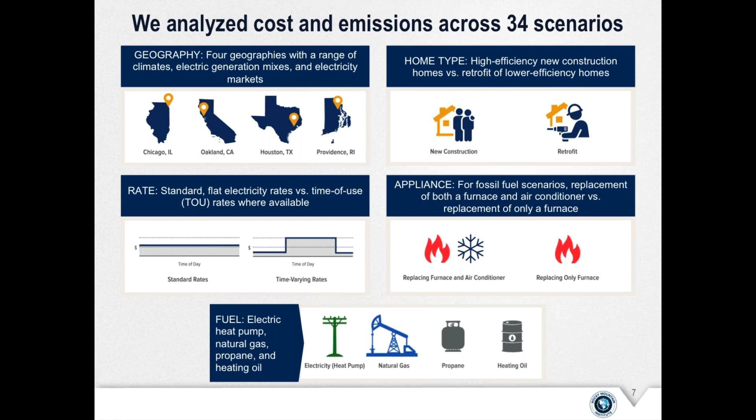Thank you. Just a few notes on the methodology: we modeled the heating, air conditioning, and water heating for a full year at 15-minute intervals for both scenarios, using Energy Plus to model the space heating and cooling demands.

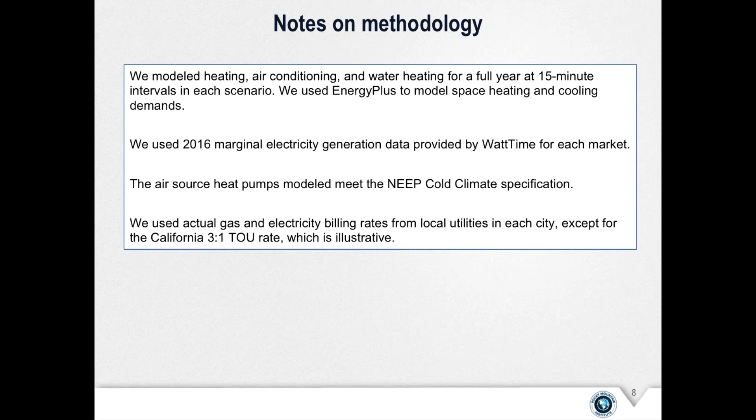In terms of the carbon impacts, we used 2016 marginal electricity generation data provided by Watt Time for each of those different markets. The air source heat pumps modeled meet the NEEP cold climate specifications, so they do work under quite cold conditions. For billing rates, we used the actual gas and electricity billing rates from local utilities in each geography, excepting the California 3-to-1 time of use rate, which is illustrative of a more dramatic time of use rate option.

To give some high-level results, a big takeaway is that electrifying homes is cost-effective today in some scenarios, but is still more expensive for most existing natural gas customers.

The most cost-effective scenarios include new construction, especially when considering the avoided cost of underground gas infrastructure. Additionally, customers using oil or propane who do not have gas service will find electrification cost effective. And natural gas customers who would otherwise replace an air conditioner and a furnace simultaneously will find electrification cost effective.

Optimizing devices for time of use electric rates can significantly reduce the lifetime cost, but that depends on the rate design details and is not in itself enough to change the overall outcome between electricity and gas.

Electrification already reduces carbon emissions with today's technology and today's electric grid in all but the most coal-heavy regions. Out of the cities we looked at, that's Chicago. This is especially pronounced in a place like Rhode Island, where the grid is already relatively low carbon.

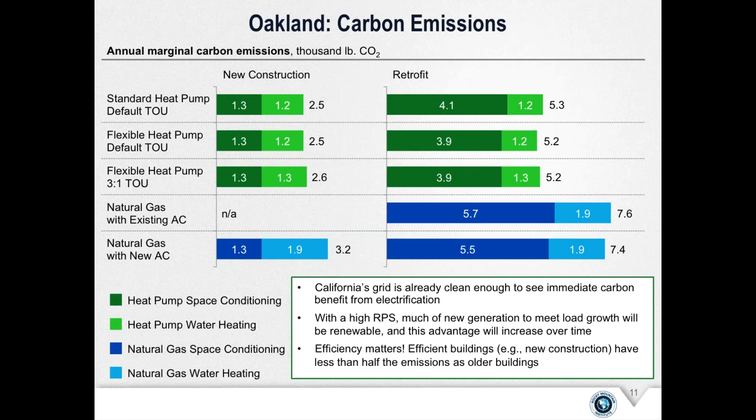Moving on to Houston, Texas, where again we looked at a standard heat pump on a flat electric rate, and we also looked at the free nights rate in Houston, in which electricity is at a slightly higher cost during the day and is actually free during the nighttime hours.

So we looked at a standard heat pump on that rate, as well as a flexible heat pump, which again tries to shift the load into those free nighttime hours. We also looked at natural gas with both existing and new AC.

Looking at the carbon emissions, the Texas grid, like the California grid, is already clean enough to see immediate carbon benefit from electrification. And again, efficiency matters. The retrofit homes had significantly higher carbon emissions than the new construction homes, because of the overheating in the free night scenario during the nighttime hours to allow for a lower load during the daytime hours. That excessive overnight energy drives the higher emissions you see in the flexible free night scenarios.

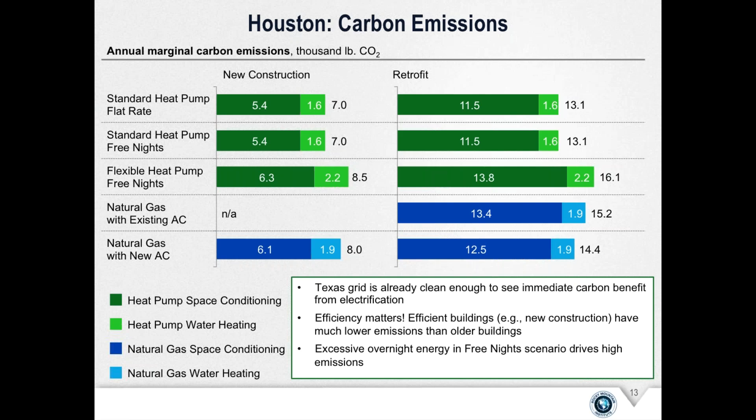So in our case, the way we optimized for demand flexibility was to apply a time of use rate and attempt to optimize the devices for that rate. We can see here in these load profiles a couple examples of what that looks like. So what's on the screen now is the Houston scenario. This is January, so it is heating season, even though it's not very cold in Houston.

As Sherry mentioned, the rate provided by one of the retailers we've chosen to model is actually free from 9 p.m. to 6 a.m., and then is more expensive in the middle of the day. So on the top profile, you see the uncontrolled load. The blue is water heating, the red is space heating. As you might expect, the space heating loads tend to be higher during the night when the temperature is colder outside, and minimal during the day when the temperatures are mild.

If we try to optimize that, the strategies we employ are to preheat the water. In this case, we've chosen a very high temperature set point because the electricity at night is literally free. We've heated it to what's probably the maximum technically feasible with this type of technology, which is 165 degrees. And then we've heated the home itself an additional 5 degrees higher than normal, in Fahrenheit. So we see it creates a much higher load in the early mornings during this off-peak or free electricity period, and then there's a big cliff right at 6 a.m. when the price kicks in.

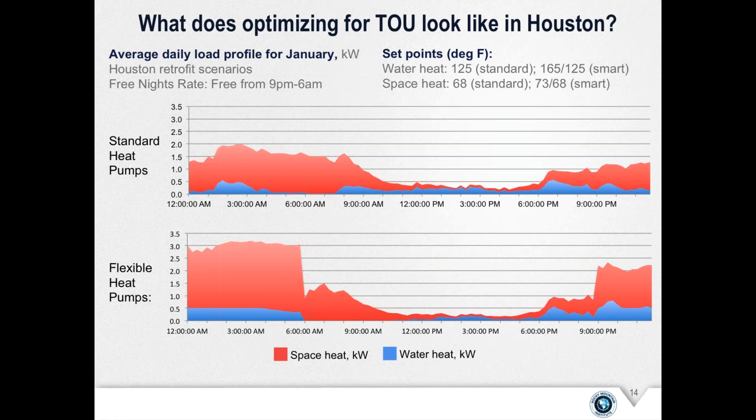If we flip to the summer, this is July now, and we're looking at an air conditioning scenario, you can see much higher use in this hot climate of energy for air conditioning. The top is uncontrolled again, and the bottom is trying to optimize.

So once again, you see water heating is pretty effective, even though it's a smaller portion of the energy. You're getting 10 to 12 hours of energy reduction out of the water heating, increasing your usage during the nighttime off-peak hours. However, on a hot day in Houston, the energy is really dominated by air conditioning.

You can see here there's only a few hours of benefit. Really, the energy starts to kick back in within that first hour on a hot July day in Houston, and by about 9 a.m. you've pretty much caught up, so you're not actually getting any benefit into the evening hours. So I'd say one takeaway is that trying to preheat, or pre-cool in this case, before 6 a.m. on a very hot day doesn't really get you a benefit into the afternoon hours for space cooling.

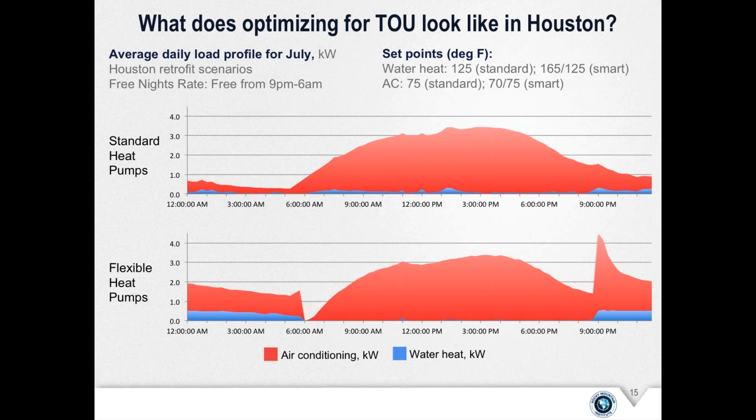However, it does get you some benefit for water heating, and this would be comparable for preheating in a cold climate. If we look at one more case, which would be the new and more efficient home,

We can see first and foremost that the magnitude of the load shape declines drastically. The timing benefits of demand flexibility are similar. The water heater is providing 10 to 12 hours of benefit. The space heating or space cooling in this case is providing 4 to 5 hours of benefit for the newer and more efficient home. But still, by far the dominant effect is the effect of efficiency, more so than of demand flexibility, because it lowers the overall profile so much.

And even though here we're showing a warm climate in summer, the profile results are comparable for cold climates in winter. That efficiency is really the dominant factor. Water heating is highly flexible. Space heating has a few hours of flexibility, but not the 10 to 12 hours of flexibility that you could expect from water heating.

Okay, so now we'll move back into the other city results, and then we'll revisit some questions after that.

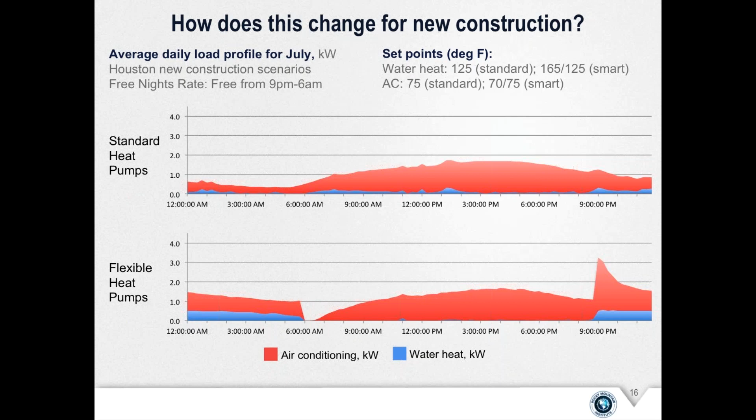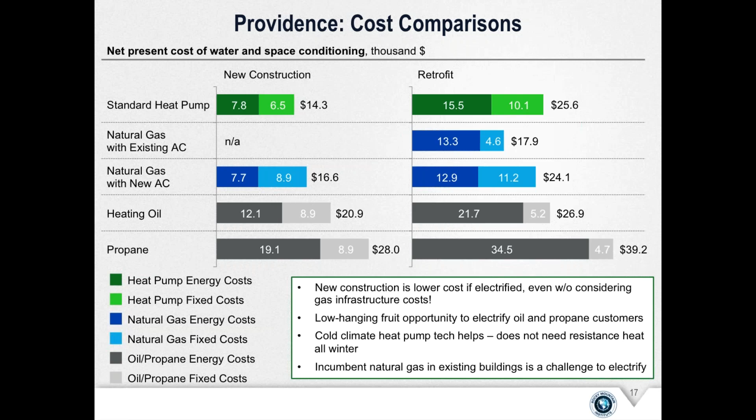Then moving over to the carbon emissions, you can see that heat pumps are significantly less carbon intensive than all of the other options, and that the New England grid is already clean enough to see major immediate carbon benefit from electrification as compared to natural gas, but obviously also as compared to heating oil and propane. And again, efficiency really matters — the efficient buildings have about half the emissions as the older buildings in some scenarios.

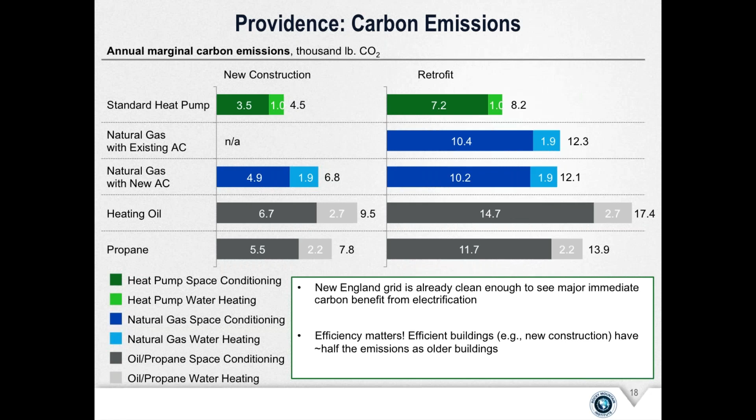Great, and then moving over to Chicago, where we compared simply a standard heat pump compared to natural gas with existing AC and with new AC, you can see that new construction, again, is lower cost if electrified, even without considering the gas infrastructure costs. And as we mentioned for Providence, that cold climate heat pump technology helps. Again, the incumbent natural gas in those retrofit buildings is challenging to electrify.

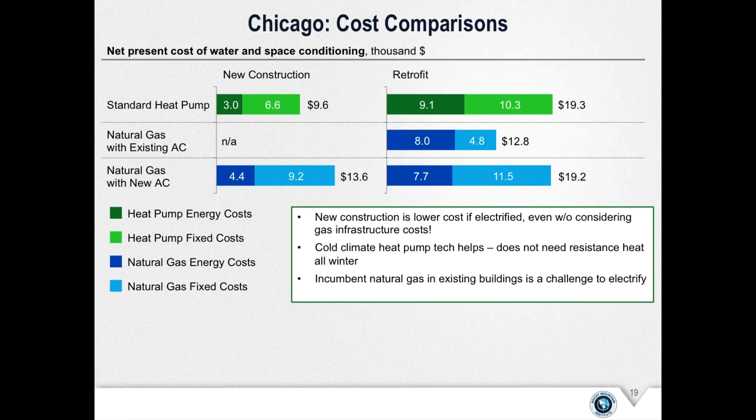Then moving over to the carbon emissions, you can see that through this marginal carbon analysis, heat pumps appear to be significantly more carbon intensive than the natural gas option. This is because the coal-dominated grid on the margin means that in this moment, electrification is immediately carbon increasing. We would expect that the carbon benefit over the device lifetime is possible if the coal retirement continues quickly. A full analysis of the future grid mix was out of scope for this report, but you can see more detail in the full body of the report as well.

We compare to average carbon emissions as well as a potential hypothetical future of what the long run marginal emissions might be. And you can see that electrification becomes much more carbon friendly, so to speak. And again, that point about efficiency holds true in Chicago as well.

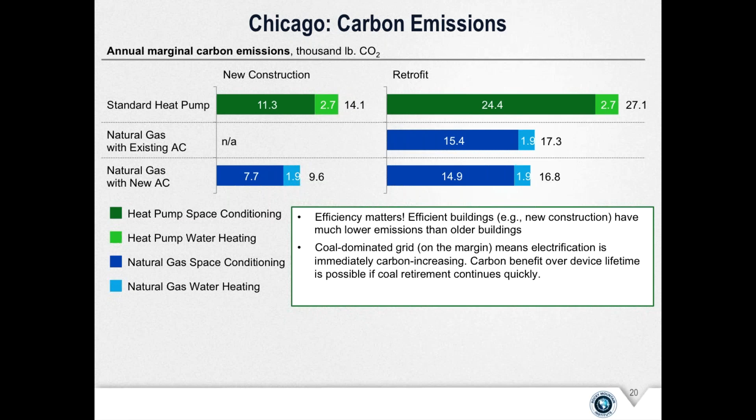So now just a little bit of an example around how, even when heat pumps are drawing power from an electric grid that is natural gas fired, they are still carbon reducing compared to burning natural gas in the home. Here we have in the first line a natural gas fired water heater with efficiency of about 62%, and you can see that it has just under 2,000 pounds of carbon dioxide annually. An electric resistance heater has significantly more carbon emissions than that.

But heat pump technology, which is what we were looking at, has a coefficient of performance that is greater than 1.

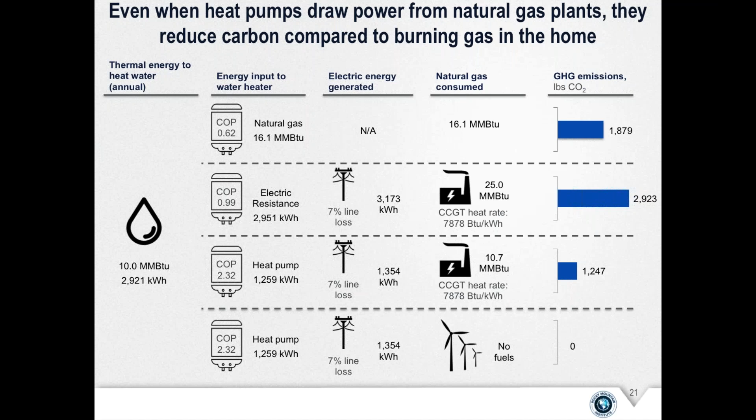Okay, we'll run through a few more slides and then we'll return to the questions.

So just a little expansion on demand flexibility. There's many services we could consider valuable in demand flexibility.

We've categorized them here. Load shedding is really the traditional demand response that curtails an air conditioner or some other load during peak period, maybe lets the home get warmer in the summer and maybe less comfortable. Load shifting, which is the approach we've taken, would try to preheat or pre-cool the space or the water in advance of the peak period.

Or additional services which are possible but which we did not include in this valuation. So ancillary services that may include frequency regulation, fast frequency response, contingency reserve, or others. These are technically feasible. They're used in some parts of the country for resistance water heaters, a little less applicable for heat pump water heaters, but not impossible.

And then localized grid support, which you could imagine but is not yet widely deployed, for managing voltage, actually building load during midday to increase hosting capacity for local solar, or managing peak on a specific circuit as a non-wires alternatives project. These are options, and these types of loads could earn additional value streams for this, but it's limited to date, and those were not included in our analysis.

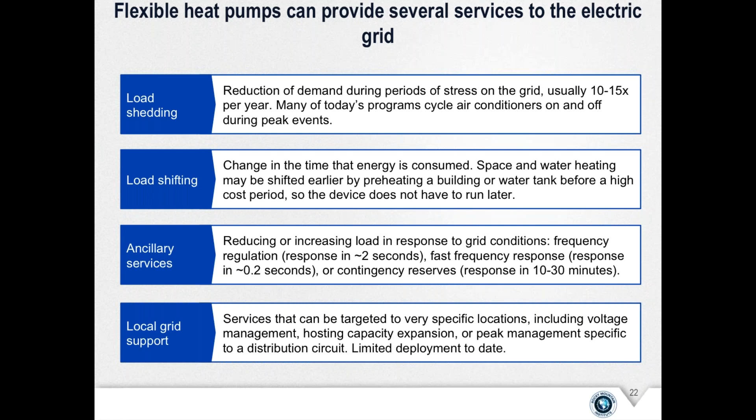So now to demonstrate that load shifting, here's an example from Hawaii of how a flexible heat pump water heater can shift the majority of energy use to the midday period where there is a lot of solar.

As you can see, with the on-peak period average daily load of a standard heat pump water heater, 25% of the energy consumption is happening during that on-peak time. But if you have a flexible heat pump where you're trying to shift that load out of the on-peak period and into the midday period with that superheating we mentioned before, you can bring that down to only 6% of the energy consumption happening in that on-peak period, with much more of it shifting towards the midday section.

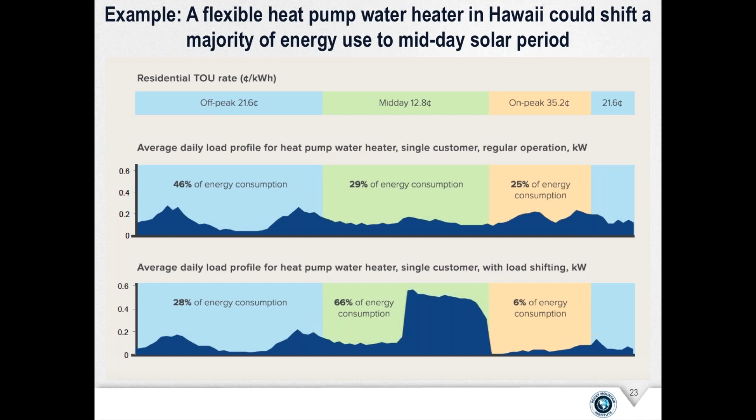So one other specific case to look at here: we wanted to explore is there an additional benefit if you combine distributed solar with electrification? We've applied that here in the Oakland scenario, and in this case, the answer is yes.

Whereas if you just look at the left two bars for a retrofit, we saw that the customer just sticking with gas could be lower cost, lower lifetime cost than switching to a heat pump. However, if we combine that electrification with installing rooftop solar in this case, we see a different outcome.

So it's very capital intensive. There's an additional $15,000 in this case for installing rooftop solar. But the long-term energy cost reduction is substantial and outweighs that, and makes the solar plus electrification a winning strategy on cost overall. And this is in part because...

In California, with this rate structure and this solar resource, solar in general is less costly than the utility electric rates. We're able to power those electric devices with lower cost energy from that solar. This is with the current time of use based net metering regime in California.

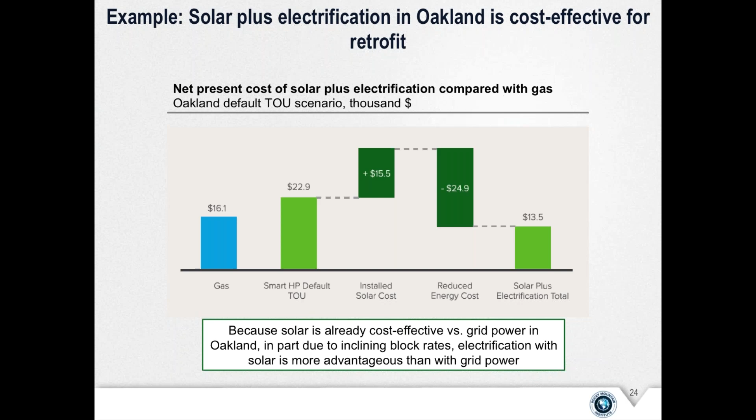And this also suggests that there's a business model, a business case opportunity for the solar installation companies to pair electrification with their solar offering. Because it's a value-added service, but also it increases the need in that household for solar panels to offset their electricity consumption. So this could be an opportunity for the solar companies to expand their business or upsell customers who are already looking to go solar.

Now, these costs vary widely. It's hard to say there's a one-size-fits-all cost. If a home is already on a street that has a gas main and just needs a new service, the small pipe that runs from the street into their home, it could be $1,000 or $2,000. It could be in that range. If a home is far from the gas pipeline infrastructure, it could easily be $20,000 or $30,000. We've chosen a median value from the data we could find here, which has an incremental cost of about $7,400, to show that cost, if considered, could even out these comparisons.

Now, there's a few other aspects to this. So one question is: is there also an additional electric infrastructure cost, which is not shown here? And the answer is it depends. So examples of that could be for a home that does not already have a 200 amp electric service panel into their home. They may need to upgrade their panel, which can be a $2,000 or $3,000 expense.

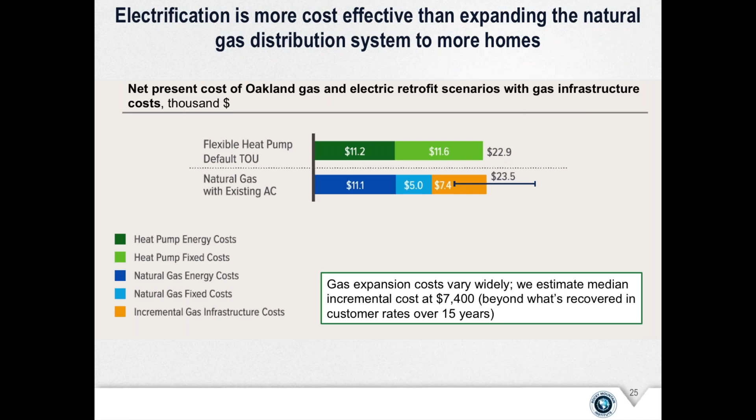Or if an entire neighborhood electrified and the feeder serving that neighborhood were not sized appropriately, that may need an upgrade. So it's possible there are additional electricity costs, and those are not shown here. But we'd argue that in general, we would expect the additional cost of the gas infrastructure to be a substantial opportunity to avoid for homes that are either distant from the gas grid currently or for entirely new developments which can be built without gas connections at all.

Okay, that takes us to the report, which makes 5 recommendations, listed here. I'll add a little commentary and I'm happy to take questions. The first two are really about prioritizing what is relatively the low-hanging fruit.

First, buildings that use propane and heating oil. We saw above that they have greater cost and carbon benefits to electrify now as opposed to those served with natural gas, so there's an opportunity to prioritize these. This is especially applicable in the Northeast, where heating oil is still a very substantial fuel used for heating buildings, and in many rural areas around the country not connected to the gas system, where propane is the fuel of choice. Propane right now is relatively expensive, making electrification a lower cost option.

Second is around the expansion of the gas distribution system. We'd argue that in order to meet carbon goals, such as an 80% reduction in carbon emissions economy-wide, there needs to be a significant transition away from all fossil fuels for heating. Therefore, investing in new gas distribution infrastructure today is an investment that's likely to become stranded within the time frame of the next few decades, when we need to switch to a lower carbon alternative.

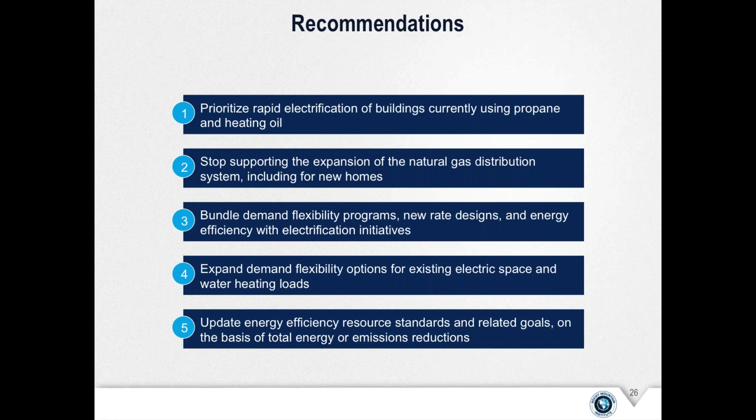All right, we have one more slide about some of the opposing views or alternate views we've heard, and you may have some of these as well. I'll characterize them as three. First, from the gas industry, particularly the recent AGA report, which argues that electrification is too expensive for too little greenhouse gas benefit. They've applied a figure of $500 to $800 per ton of CO2 averted.

I would say that this analysis uses the most pessimistic assumptions and applies them across the board, and does double count some costs. So that cost estimate is higher than what the strategy we would recommend would result in. As an example, that analysis uses heat pumps that are not rated for cold climates nationwide. So even in New York and New England, you're using heat pumps that don't function well or at all below 20 degrees, 15 degrees, 10 degrees Fahrenheit, which is much more costly.

I would say it does highlight the risks of using the wrong technology, insufficient efficiency, or failing to manage the impacts to peak load. And I would also assert that gas efficiency alone, while it can reduce emissions, is insufficient to reach the scale of carbon reductions needed for 80% goals.

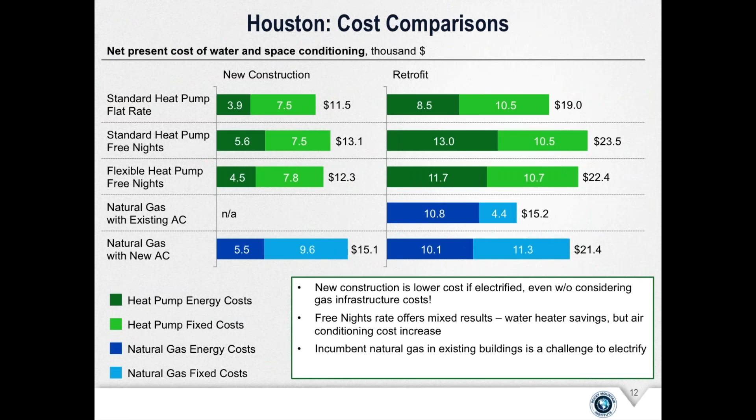Mike, do you have anything you'd like to add there? No, that's great. I'm going to move on to the next question so we can get to a few more. So one of them asked about cooking. The specific question is if there's another RMI study about electrification of cooking. The answer is no, but I can say a few things about cooking. So I'm going to scroll back to one of the early slides.

And I will say I recognize the preference that many people have, the emotional attachment they have to gas cooking. I believe electric induction cooking is a highly capable alternative for folks who really enjoy the amount of control they have in their heating as they cook on a stove, and it's equally capable. However, there's a large inertia and a perception that gas cooking is the best option, especially for higher-end customers, and that will be a real barrier to customer adoption. And so increasing interest and excitement around induction cooking would be one strategy to increase customer interest.

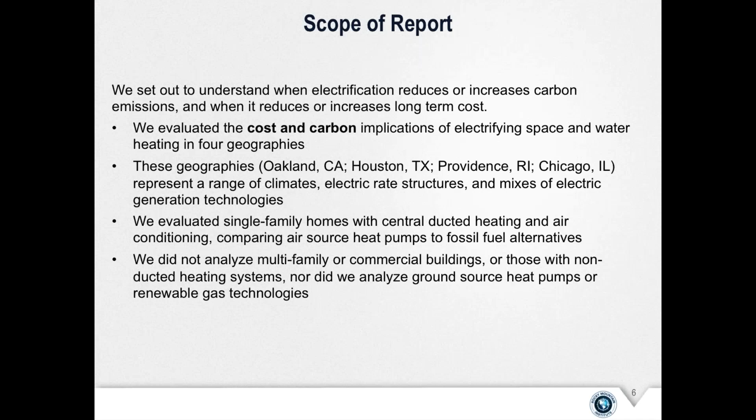So we'll return to the questions here. One is, have you looked at how a new time-of-use regime in Oakland comparable to Hawaii would affect the Oakland retrofit case? I'd say yes, to a point. We looked at two time-of-use scenarios in Oakland: the default time of use, which most California customers will soon be on, where we showed it wasn't a big advantage.

In fact, spending a few hundred dollars extra on smart thermostats and enabling technology to make devices flexible cost more than the customer would save under the default time-of-use rate, where the price premium is only 10% or less in winter and 20% in summer. Our alternate case was a 3-to-1 ratio of peak to off-peak pricing, where we saw nearly $1,000 in lifetime energy savings from dispatching the device differently. So it wasn't exactly like the Hawaii scenario, but similar, and showed results.

So we have a few other questions here. I'm sifting through them. There's a question about clothes drying, or comments about clothes drying.

That's one of the other uses of natural gas in the home, clothes drying. It's smaller but not far behind cooking in terms of energy usage. Again, there's a new all-electric technology alternative. The comment suggests ultrasonic clothes dryers are an efficient electric technology, and that's right. Similar to cooking, there's an older electric clothes drying technology that's somewhat energy intensive, and then a newer one, ultrasonic drying, which I'd compare conceptually to induction cooking as the newer technology starting to gain a foothold as an alternative to gas.